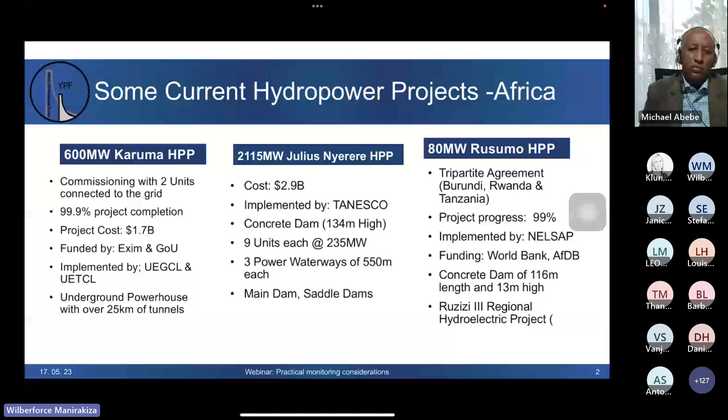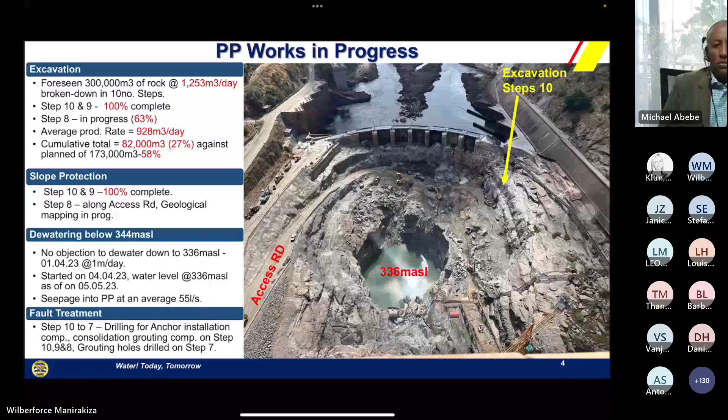You are also invited to the Africa Hydro Conference, which will be from 10th to 12th July 2023, hosted in Uganda. Back to you, Janice.

Thank you so much, Wilberforce. It's always so exciting to hear about the current hydro projects that we have in Africa, as we all know there's so much potential in Africa, and us as engineers need to do our best to make sure that these projects are optimized and go forth to help the communities around us.

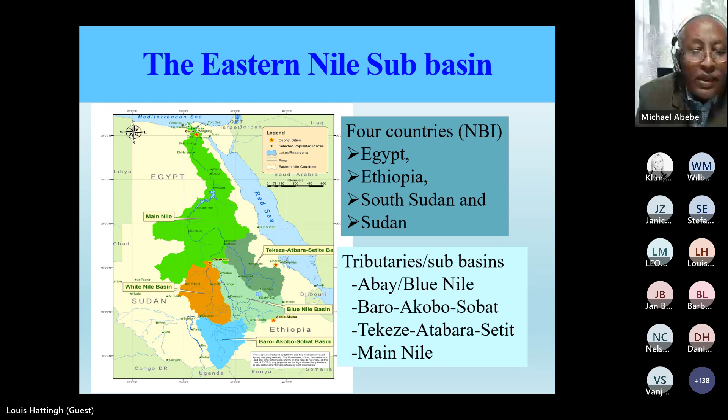Now I'll give some idea about the storage or dams available in the Eastern Nile countries, showing why dam safety is an issue in the sub-basin. The first is the GERD, the Grand Ethiopian Renaissance Dam, about 145 meters high, an RCC dam with an installed capacity of about 5,150 megawatts. It also has a saddle dam, 50 meters high, a concrete-faced rockfill dam. The dam is currently under construction, with storage capacity estimated at about 74 billion cubic meters.

The Tekeze Dam is also in Ethiopia, the highest concrete arch dam in Africa, with about 300 megawatt capacity. It was commissioned in 2009. Both dams are located in Ethiopia.

This is the Sennar Dam, located in Sudan, a 39.5-meter-high composite dam with masonry gravity sections and earthen flanks. It was commissioned in 1926 and has been in service for more than 95 years. It is located on the Blue Nile river.

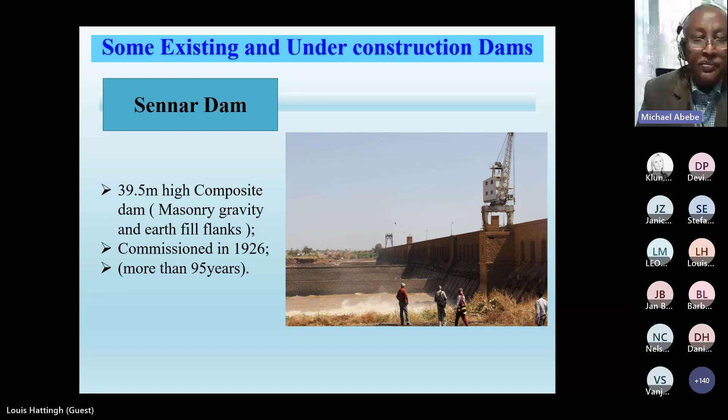The Aswan High Dam, which most of you know, is located in Egypt, a 111-meter-high composite dam, rock-filled with a concrete gravity section. It is the second largest water storage capacity dam in Africa, with a capacity of about 162 billion cubic meters, and was commissioned in 1970. This highlights the large or mega dams available in the Eastern Nile countries.

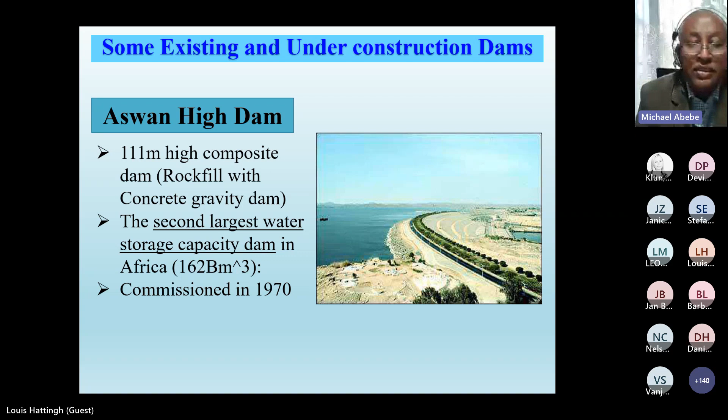Now, the dam safety activities with regard to the Eastern Nile part: what are the key activities undertaken and what are the key achievements made in the last 10 years?

The objective of this program is assessing dam safety practices in the sub-basin countries and developing a roadmap for subsequent actions, creating an enabling environment with an appropriate regulatory framework and institutional development to identify responsible entities and organizational units, and strengthening regional cooperation on safety management of transboundary dams. Overall, the main objective was to assess the capacity in the basin and the capacity gaps, and to act on the gaps identified during the assessment.

The project was launched in 2013 with support of the World Bank as part of the Nile Basin Trust Fund. It's been almost 10 years since it started the dam safety capacity building programs in the Eastern Nile Basin.

What we did first was assess the existing legal and institutional framework, technical and human capacity in the 4 countries: Egypt, Ethiopia, Sudan, and South Sudan. What are the legal or regulatory frameworks? What is the institutional arrangement? Who is responsible, and how is it arranged with the responsible entity? What is the role of the regulators and also dam owners and operators? And also, the third one is human resource capacity.

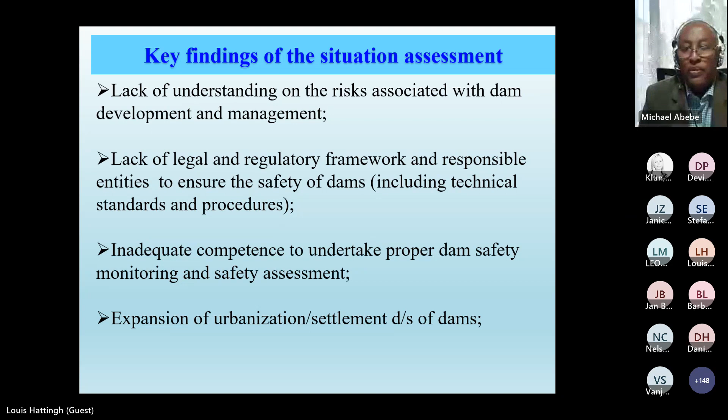The next one is lack of cooperation in transboundary dam safety management. These dams also have transboundary effects, so there is no cooperation among the countries in managing the safety of these dams.

Next is financial constraints to undertake proper maintenance and regular safety assessment of dams. Proper maintenance work is one of the key aspects of safety management, but we identified constraints, particularly by dam owners, in undertaking proper maintenance and regular safety assessment of dams.

Finally, we identified uncertainty of climate change and its implications on operations and safety of dams, particularly aged dams. This is also one of the critical issues in dam safety management in the Eastern Nile countries.

After identifying the critical issues in these countries, we developed a roadmap outlining what actions should be undertaken to alleviate these problems or make progress on dam safety management in the Eastern Nile countries.

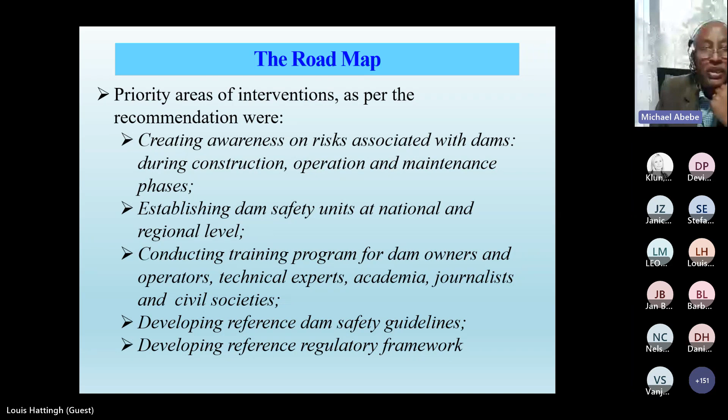The last one is developing a reference regulatory framework. As I mentioned earlier, this is the key concept or foundation for proper safety assessment and ensuring the safety of dams. So we suggested developing a reference regulatory framework for the Eastern Nile countries.

Based on that roadmap, we organized different technical trainings. More than 400 professionals have been trained in various dam safety related topics. Participants included parliamentarians, regulators, dam owners, dam operators, consultants, experts, and professionals. A lot of stakeholders were involved in the training programs.

In addition to the Eastern Nile countries, we also invited experts outside the Eastern Nile countries to take part in the dam safety training: Mozambique, Zimbabwe, Zambia, Malawi, Nigeria, Ghana, Liberia, Tanzania, Rwanda, Uganda, and Kenya. We invited technical experts from these countries to take part in the dam safety capacity building programs.

This is to give you an idea of one training program, which was to provide awareness of dam safety projects and its relevance to high-level officials. In this picture you can see parliamentarians represented from Ethiopia, South Sudan, and Sudan who attended the workshop. We discussed the role of government, dam owners, and operators in managing the safety of dams, including discussions with parliamentarians about their roles in ensuring dam safety.

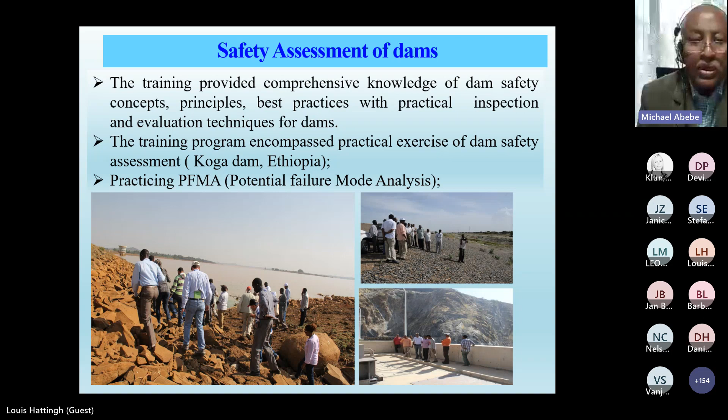The Eastern Nile Technical Regional Office also has internship programs, with the objective of creating a network of young water resource professionals in the sub-basin and engaging them in the development and enhancement of knowledge-based products. These are graduated master's or PhD students, postdoctoral researchers from academic institutions, as well as young staff in ministries. A total of 15 young professionals engaged in the dam safety programs.

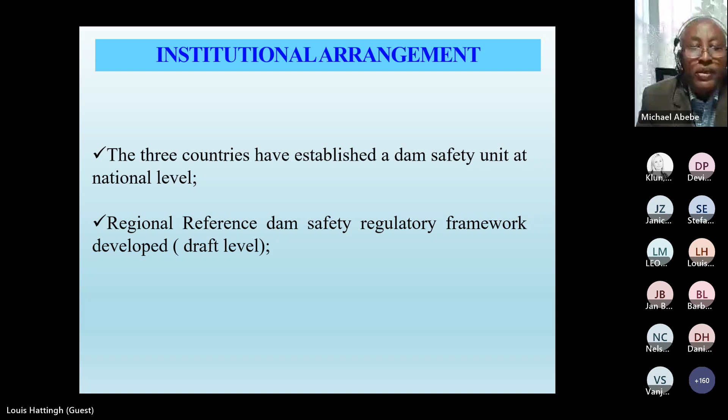The next topic is the Nile Cooperation for Climate Resilience Project, called NCCR. It encompasses the whole Nile Basin countries. Originally it was only for the Eastern Nile, now it covers the whole Nile Basin. The program started in 2021 until 2025, supported by the World Bank CIWA Fund.

To give some background, this project was launched in 2021 and will be completed in 2025. It builds on good practices achieved in the Eastern Nile Dam Safety Project, where good progress was observed on dam safety management activities in the Eastern Nile countries. Countries wanted to upgrade or scale up the project to the whole Nile Basin, which is why this project came into being.

It encompasses all Nile Basin countries, coordinated by two NBI centers: the Eastern Nile Technical Regional Office at ENTRO, based in Addis Ababa, and the Nile Equatorial Lakes Subsidiary Action Program Coordination Unit, NELSAP-CU, based in Kigali. The overarching objective is strengthening the institutional environment for dam safety, improving the information base, and increasing coordination of dam safety management in the Nile Basin countries.

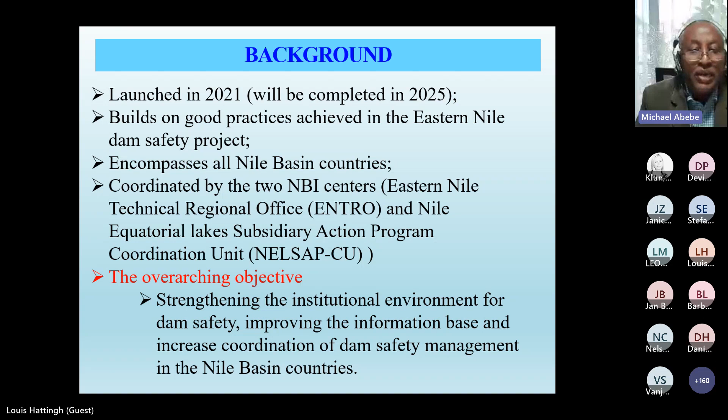The components of this project include conducting training programs on various dam safety related topics, and establishing national dam safety units in the NEL region. Eastern Nile countries have already established their own dam safety units; the next step is to establish these units across the wider Nile region.

Other components include strengthening national dam safety units at basin level, and developing a geo-referenced inventory of dams in the Nile Basin to understand the number and location of existing dams. The next is development of a risk management framework for dams in the Nile Basin, and an assessment of the legal and institutional framework for dam safety in the Nile Basin, to understand the legal and institutional aspects across the region.

As I mentioned earlier, we have tried to do some assessment in the Eastern Nile, but now to make it more comprehensive, it was suggested to develop some assessment for the whole Nile Basin countries. The next one is development of a model national regulatory framework that covers standards for new dam development and safety of existing dams. This is a very critical thing, as I mentioned earlier. One of the ideas of the project is to develop a model national regulatory framework so countries could adopt it for their own purposes.

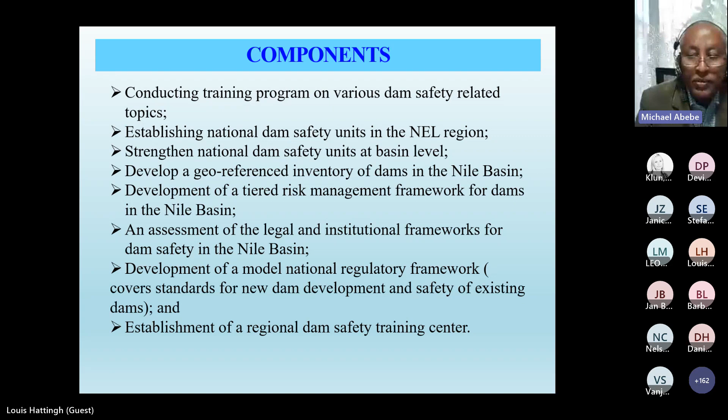Next one. So key accomplishments: as I mentioned, it started in 2021 and continues until now. Training of experts on various dam safety related topics has been carried out, and a draft report on the Nile Basin dam safety regulatory framework assessment was submitted, with a consultation meeting held with the Nile Basin dam safety working group.

As I mentioned, the draft report was submitted and discussed with key stakeholders. A draft report on the inventory of dams in the Nile Basin was also submitted, and a consultation meeting with the Nile Basin dam safety working group was conducted. So the inventory of dams and the framework are now at draft level. A consultation was made, so hopefully they will be finalized in the coming one or two months.

Next one. These are my conclusions. Building institutional capacity is of paramount importance for sustaining and ensuring the safety of dams. We need to recognize the need for capacity building programs at all levels. Next is setting institutionalized dam safety management, meaning including the legal and regulatory framework, with a responsible entity having the required technical capability and financial resources in place. We have to ensure that dams are properly designed, constructed, operated, and maintained safely, and do not pose an unacceptable risk to life, property, and the environment for downstream communities.

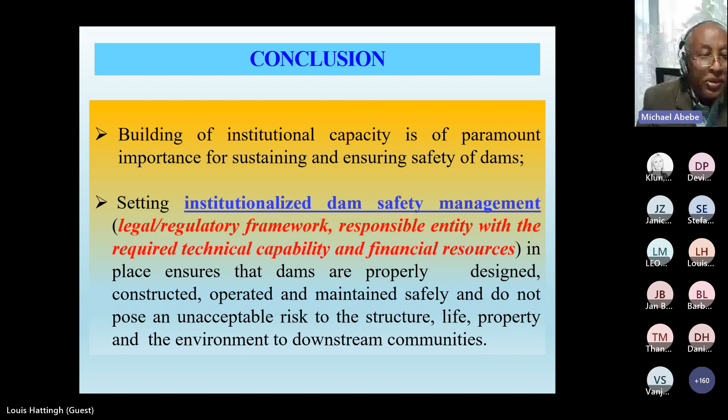So this is my key message to participants, particularly for developing countries: you have to formulate a standard national dam safety management framework at the national level that will contribute to ensuring the safety of national or transboundary dams. Thank you very much. Finished.

Thank you, Michael. It is really lovely to see all the work that you and your team have done. We'd really like to thank you for that, because as most of us know, in many African countries we don't really have standards and guidelines on how to actually safely look after and monitor our dams. Thank you for identifying the problems we are experiencing with our dams and how we can approach them with the roadmaps and guidelines that you and your team have written up for us.

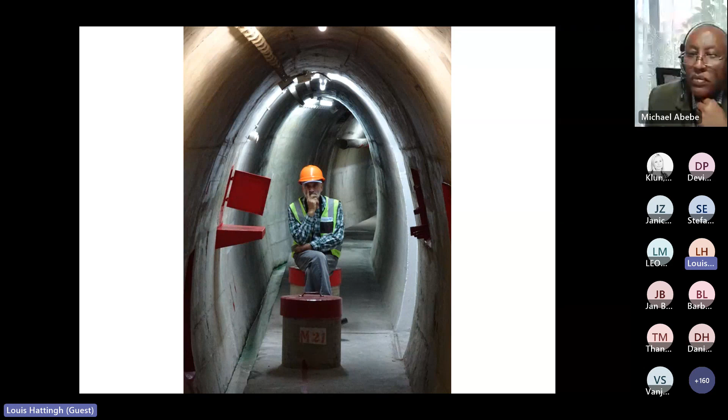So I want to first tell you guys what I'm not going to do today. I'm not going to provide any recipes or specifications, and I'm not going to tell you how many instruments you must use and where you should use them. What I will do is share some of my experience, and hopefully pose some questions and provide some food for thought if you want to do something on the monitoring side. I'm going to really focus on the basics, so I'm not going to discuss any new technologies or new things. I'm really going to focus today on the basics that normally don't get a lot of attention.

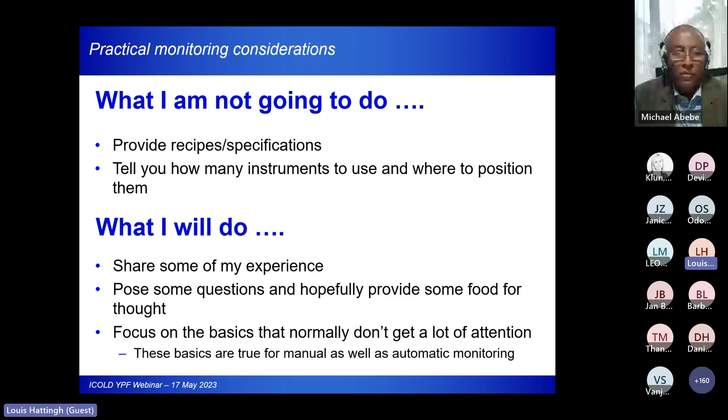So I want to start off and pose the question: what is the definition of surveillance? I'm putting on my ICOLD committee on dam surveillance hat, because I know the industry out there interchangeably talks about surveillance and monitoring and inspections, and sort of mixes all these things together.

In the ICOLD sense, in the bulletins produced in the past, the definition for surveillance includes three major aspects: first monitoring, then visual inspection, then checking and testing. Checking and testing is not checking the results of your monitoring and visual inspections—that's very important. Checking and testing are for components like mechanical equipment, electrical equipment, things we struggle to do visual inspections and monitoring on, that we need to check and test on a regular basis. All of that together is the definition of surveillance. So in the rest of my talk, if I talk about surveillance, that's what I mean.

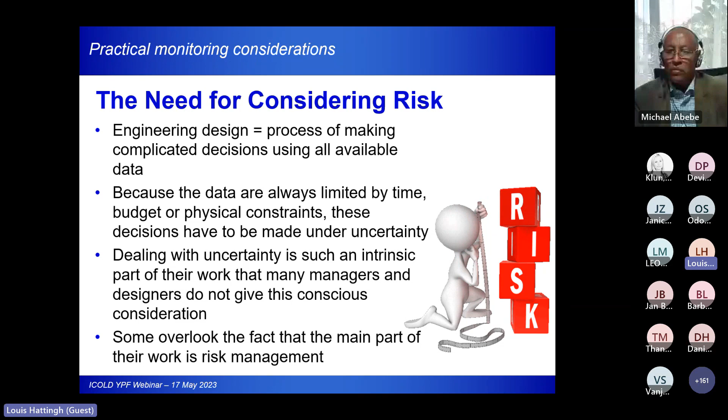The other concept I want to talk to you guys about—because it's very important to understand with regards to monitoring as well—is that if we have uncertainty about something, one of the ways we can manage or improve it is to gain more knowledge. The more knowledge you have about the subject you have uncertainty about, the less uncertainty you will have.

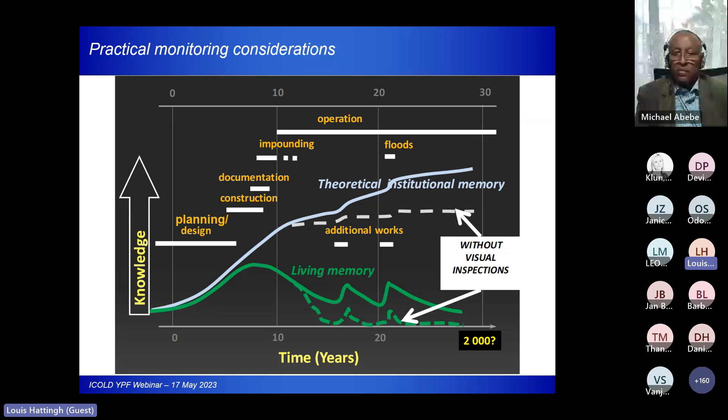One of the questions is, yes, you are now operating the dam, but there might be 2, 3, or 4 generations after you that actually need to know about the behavior of the dam when you were operating it.

So I was talking about risk management, the need to manage this uncertainty. Surveillance plays a very crucial role during the operational phase of a dam to manage the risk of this uncertainty, because we gain information and we can take preventative actions if we see that we might get a failure before it actually happens.

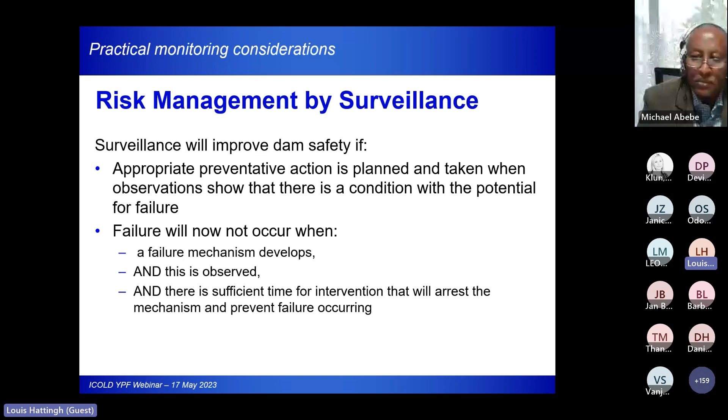One of the other things I grew up with in my system, and I can promise you it is crucial to appreciate this, is as Ralph Peck has stated: there is no substitute for systematic and intelligent surveillance. It's very important—systematic, intelligent. If you don't follow those two principles, as I get older I actually tell people that they're wasting their own time and other people's time, because we're creating more uncertainty if we don't follow those two principles. Very important to remember that.

Now, with that in mind, Michael was talking about dam safety management, including surveillance. You need to understand how your dams are actually going to fail—what are the failure modes and failure mechanisms? And to understand your failure modes and mechanisms, you need to understand the dam materials you're working with. In many cases, people don't understand the dam materials they're working with, especially regarding surveillance and monitoring, and they implement the wrong solutions. Then you create more uncertainty because you don't get what you want out of the effort.

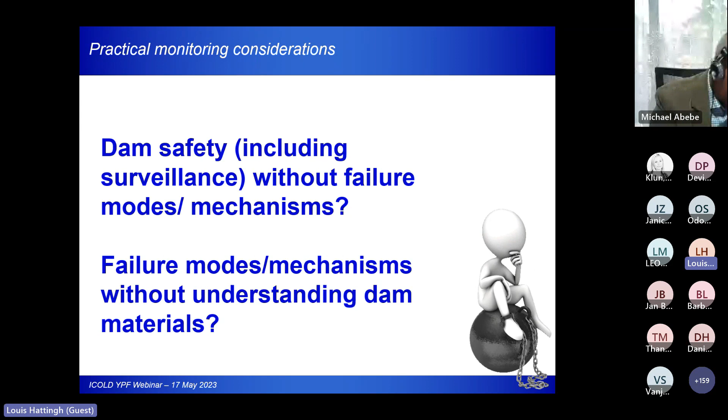The other very important concept I want to highlight—again, I grew up in a system that believes in this—is something John Dunnicliff wrote in his book, one of the guidance books we use in monitoring: every instrument on a project should be selected and placed to assist with answering a specific question. If there's no question, there should be no instrumentation. So you need to understand why you actually put the instrument in. Why do you do monitoring?

I see it so many times that when I ask people why they put an instrument in, they tell me, well, I saw somebody else put it into their dam, and I thought if somebody else uses it, we can just as well use it. It will create more uncertainty. You need to understand what your system, or your dam, is actually doing.

So the ideal monitoring system is as follows: it should be simple, it should give you sufficient information when you need it, and it should have redundancy—I'll talk about that later. It should be durable, reliable, low cost, low maintenance, easy to measure, and provide foolproof readings. That sounds all so easy, but I can promise you it's not. So I'll try and give you some guidance on that.

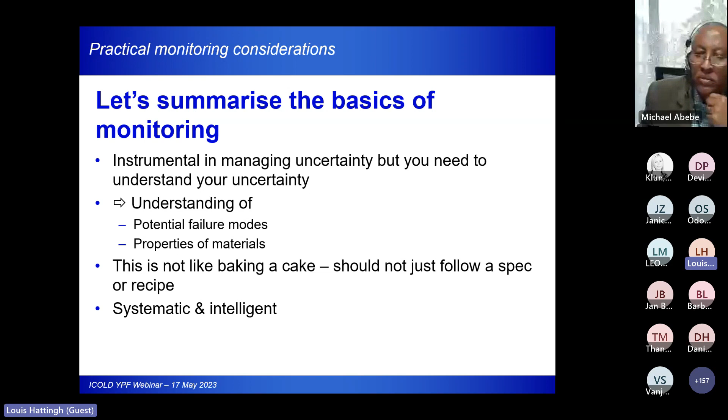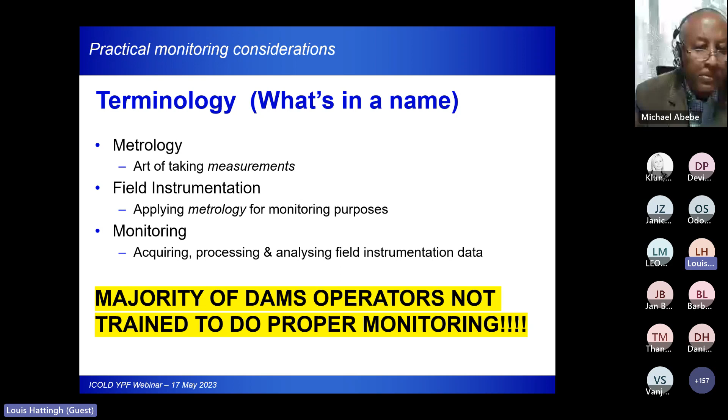It's really an art to take proper measurements. Unfortunately, through my professional life, I've seen that the majority of people required to take measurements are not trained to do proper monitoring and take proper measurements. It's not the focus of most people. Hopefully after today I can inspire a few people to get them trained properly so they can take proper measurements.

So how do we do basic metrology?

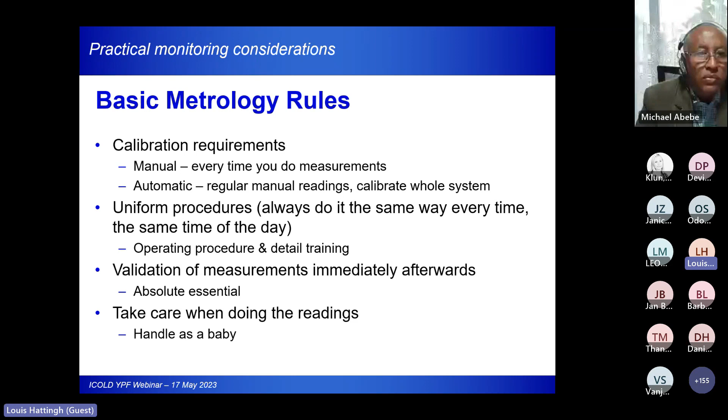Also take care when you're doing these readings. There are some other general monitoring things that are very important to follow.

Another thing that is very important, and I struggle to convince a lot of people about this, is to collect monitoring metadata. Whether you do manual or automatic monitoring, it's extremely important. The databases you have, whether Excel or a customized information management system, should make provision so you can record the metadata.

That metadata includes, for instance, if it's a manual recording, who was the person responsible for the observation, information about what readout unit or data logger was used, your calibration readings, and any comments that came out of that.

I've seen it so many times - you try to interpret monitoring results, you see a step, and you don't know 20, 30, 40, 50 years down the line why the step happened. If you're fortunate enough to still talk to somebody who was involved at the dam, they'll tell you, well, we started using a new readout unit or the instrument was replaced. It's extremely important to record all that metadata for your monitoring system.

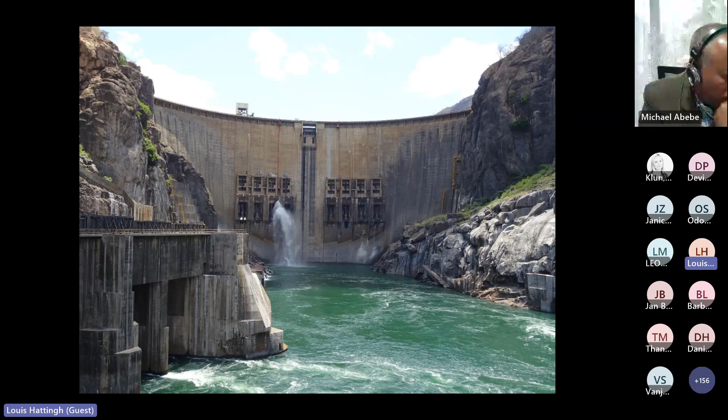I'm going to quickly show you a very good example here in Africa of a dam where very good monitoring is taking place. This is Cahora Bassa Dam in Mozambique on the Zambezi, one of our mega dams in Africa. It's a 170-meter high concrete arch dam.

They have more than 1,000 monitoring points in the dam, and every single monitoring point has a description - an instrument name, the elevation of the instrument, and they even put the database number there. So for every single instrument you get to, you don't have to guess what instrument you're working with. These guys have been trained since the beginning of the dam to do things properly.

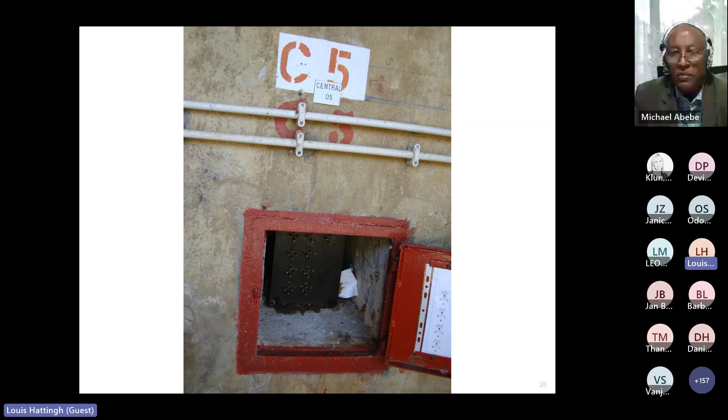I'm going to show you some examples. Every single instrument has proper signage. This is an old Carlson instrument, before vibrating wire instrumentation became the norm - these were installed in the early 1970s, and you can see what they actually do.

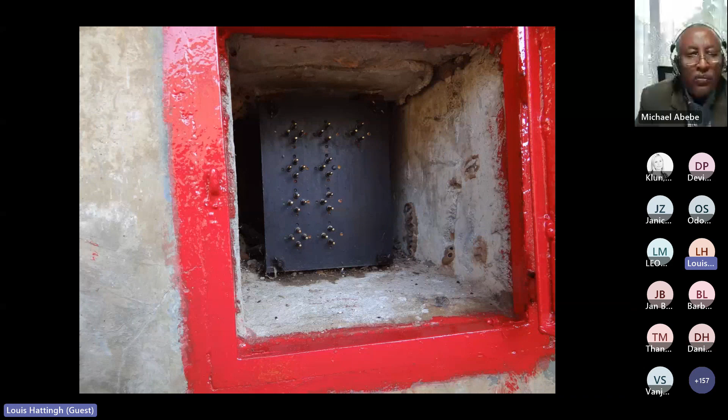Every time they do a measurement, they clean it, take the measurement, and then clean it again and protect it. So you will see no corrosion. Those are actually brass, but you see no corrosion. There's even a sheet at each of these stations so you know precisely what you're dealing with.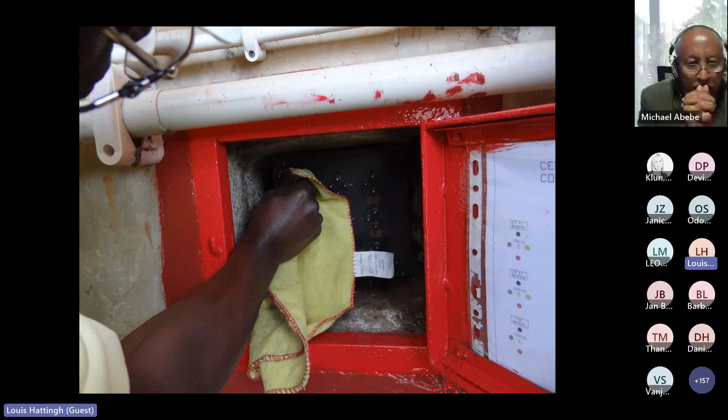Very, very important. So you guys can see just some more photos, and as a result you get data sets of information. Here you can see the displacements, for instance, with no gaps. So if I look at that, with the concept of uncertainty, that information does not create uncertainty in my mind. It actually creates certainty about what I'm trying to measure.

The interesting thing here to remember is that Mozambique was actually in civil war from 1977 to 1992. So it's amazing for me to see a dam with a record like this, even when we had the civil war going on in the country.

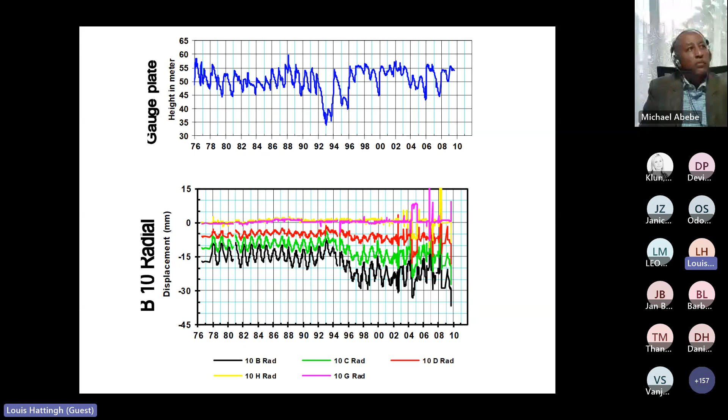Now I'm going to show you some examples of where things went differently. You guys can see this is a big dam here in South Africa. Since 2004, the information started getting a bit iffy, and you will agree with me, the uncertainty of what actually happened with regards to the displacement at this dam increases.

Here's another example of a dam. You can see fairly good information until about 2001, and then it seems the person who's supposed to do the monitoring just completely lost interest. So since 2001, we basically have uncertainty about the behavior of this dam, which increases the risk for us. That is what we don't want to do.

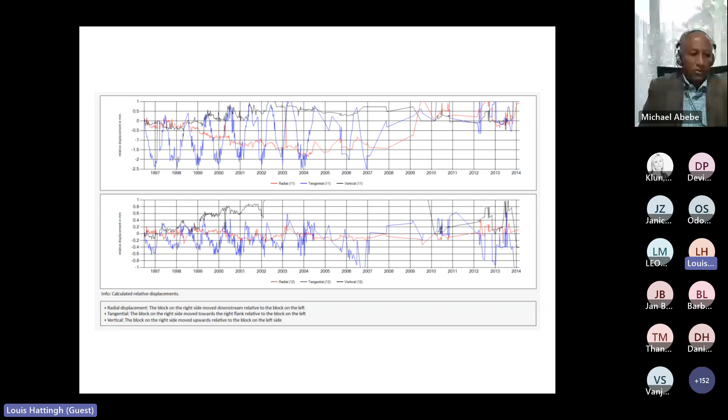I want to pose some questions to those of you who are actually performing dam safety evaluations today. The first one: have you checked whether the dam operator knows how to do proper metrology when you did your inspection for your dam safety evaluation? And if you found out the person doesn't know, did you show them how to do it properly? Or you must ask yourself, do you yourself know how to do proper metrology?

Another thing is that normally, people do dam safety evaluations and inspections, but they don't do an evaluation and inspection of the monitoring system itself. It is crucial that you actually do that. I get it many times.

People ask me to help them with the interpretation of monitoring information. They just want to send me the information, they don't want me to actually go and visit the dam and do an evaluation of the monitoring system. It is absolutely crucial to go and do an evaluation of the actual monitoring system. You can't just do desktop interpretation. That's what I've learned through the years. You're going to miss things if you just try and do desktop evaluations.

So I'm going to start off with crack gauges, which is one of the simplest of instruments that you can actually install in a concrete dam. Okay, so a crack gauge just measures displacement, or translations.

But if we actually deal with concrete, it is very important to understand the characteristics of concrete, and many people don't take that into account when they decide on a specific monitoring system. One of the things is, for instance, your elastic properties. Concrete is a relatively stiff material, so even for large loads imposed on concrete, it actually does not displace a lot. That's one of the things you need to take into account.

But then we have things like creep, shrinkage, permeability, and very important, if we deal with dams, these chemical reactions that cause swelling. I'm not going to use alkali aggregate reaction or alkali silica - I'm going to refer just to chemical reactions that cause swelling. It doesn't matter what the type, but it's very important to actually keep that in mind.

So as I said, and I want to highlight it again, you need to have an understanding of the expected behavior of your structure before you decide on your monitoring solutions. With the crack gauges as an example, I'll try and show you what I mean. There are some questions I'm going to try and answer - about accuracy, the instrument type, the frequency of measurements, the readout unit, and calibration. Those are typically some of the questions you can ask for most monitoring systems.

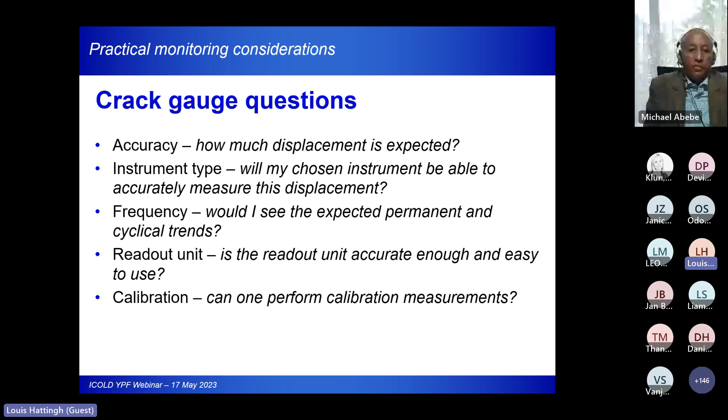My first question to you would be, what is the accuracy of an instrument like this? And I can tell you it's more a millimeter or more. So I'll try and show you now why I think this is not appropriate. It does not really give you any appropriate answers, and you can see a lot more if you install appropriate instruments. That's what I'm trying to tell you here.

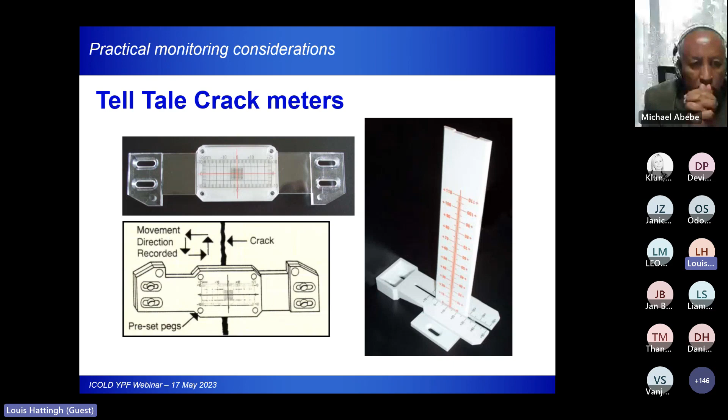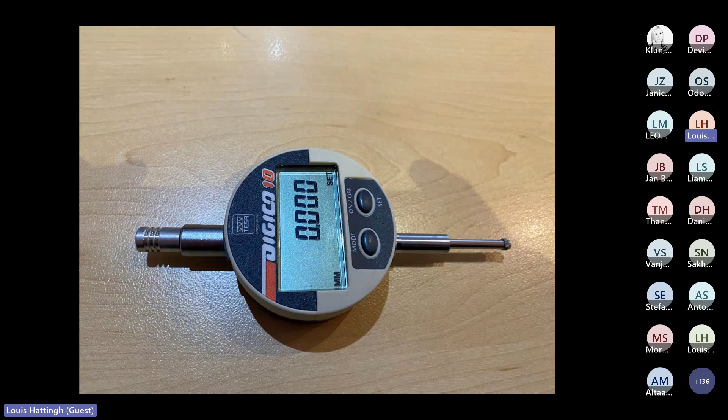Okay, so what I would suggest, I'm not trying to sell, but is to actually use a digital micrometer that has been adapted to fit snugly in your 3D crack gauge. All right, and these are the 3D tilt crack gauges that we nowadays use. So you can actually get rotations as well as translations from the results of these.

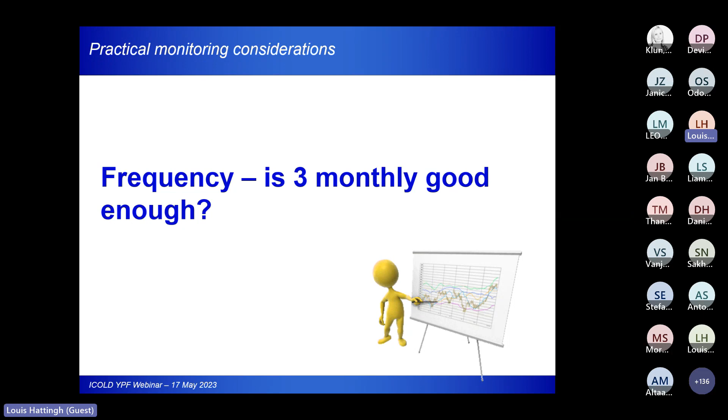So the other thing that I see a lot is if we use crack gauges like these, in general people think that using a frequency of 3-monthly readings is good enough. And yeah, I know a lot of people in the dam industry actually think these crack gauges don't show you anything. And I must agree with you if I see a graph like that, or a presentation like that, where the operator actually tried to do 3-monthly readings - I do agree that doesn't show you a lot, and most of you guys will agree with me that it doesn't show us a lot.

But now I want to show you the next one, where we have a very good operator that takes 2-weekly readings, that is systematic about it - first thing in the morning does the readings. Then you guys will actually agree with me that the results I'm showing you here, from the same crack gauge, the same type of crack gauge, we can actually see a lot more.

So here, if I can just show you, you can actually see the seasonal temperature change loading that we see. We actually see permanent deformations here. And I want to highlight basically the scale here - so this is 1 millimeter.

So now you can start thinking: if you have something with an accuracy of 1 millimeter, we might just see some of the tangential measurements, but we won't have a good idea about it. We won't see any of the radial and vertical displacements, which are crucial, the permanent displacements as well as the loading from seasonal temperature changes. So for instruments like this, we need an instrument with 0.1 millimeter accuracy, otherwise we won't see what we actually want to see from the results.

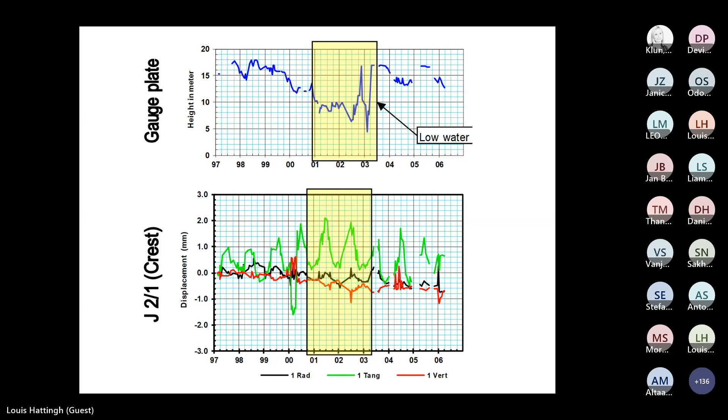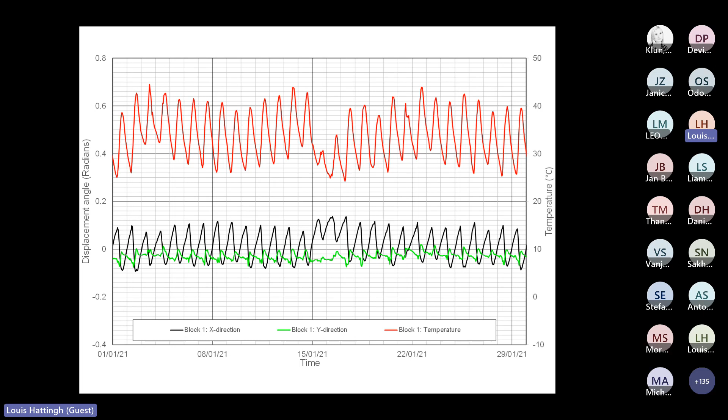The other thing is, if you do it properly, crack gauges can show and tell you so much when you do proper interpretation. It can show permanent displacements from swelling reactions - you can get a very good idea. For instance, if you work with an arch, where your main arch action is, where your main stresses are concentrated - all sorts of very important information from this very simple instrument.

I know a lot of people, especially in concrete dams, feel it's a waste of time to use this instrument. So this is basically just my take: definitely use a 3D crack tilt gauge with 0.1 millimeter accuracy. Make sure you have calibration that you do before and after your daily measurement.

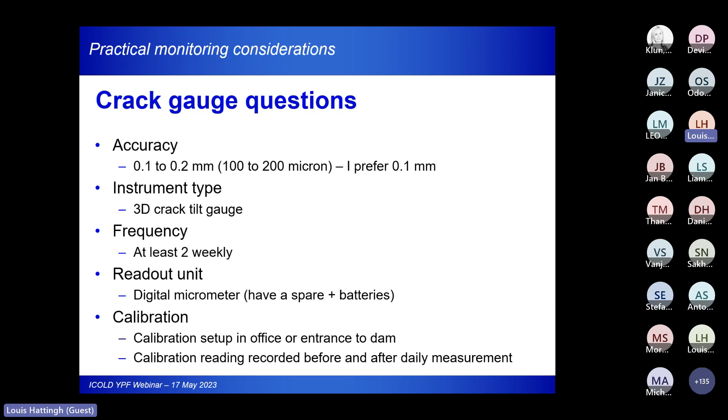Some other important concepts I want to talk about are with regards to geodetic surveys, and I need to speed up a bit - I've fallen behind with what I wanted to tell you. If we look at some of the issues I see, especially when we want to do geodetic surveys with concrete, it's with regards to accuracy and thermal effects on the instrumentation as well as the network. Also, in many cases, people don't understand that you actually need a proper network on the outside - they think you can do a measurement just from one fixed point outside your dam.

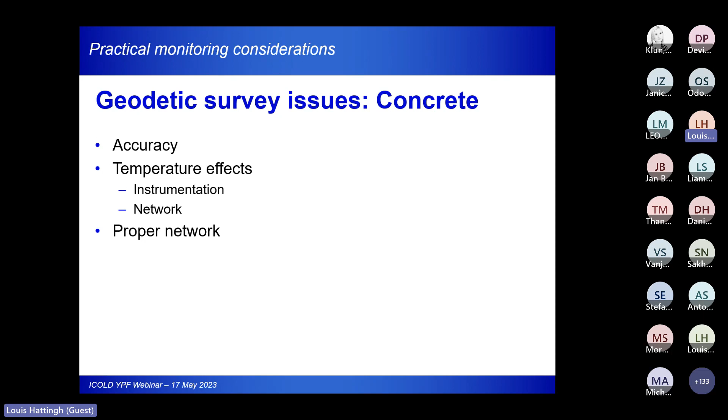This might not be relevant for many of you, but in the world where I work and live here in Africa, I see a lot of times people think you can use a normal surveyor with a GPS system to perform a geodetic survey of a concrete dam. I even see surveyors who claim they have 1 millimeter accuracy. If you actually look at the accuracy of these systems, you'll know we're still looking at about 10 millimeters accuracy. So definitely, absolutely not - if you work with an important large dam, it will not provide you with the accuracy and the right answers if you use that.

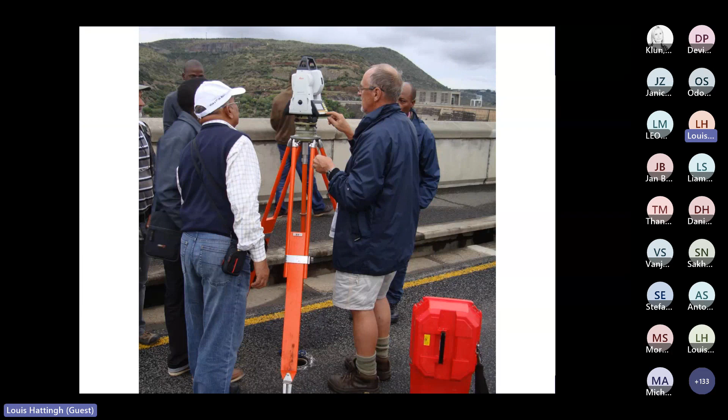And what I mean with this is people actually just using normal survey studs with a mobile prism system that they're trying to balance, walking around. And I think I've already showed you the typical displacements we can actually expect in a concrete dam, so definitely that would not work. You really need high precision survey equipment to do that.

Including high precision prisms, for instance, and a permanent setup.

The other thing we've really seen through the years, and we've changed it here in South Africa, is these beacons, either on the dam wall or on your network, but especially your network. If you have a beacon that is made from concrete and not isolated from thermal effects, it will actually displace as the sun goes around and have a huge effect on the accuracy of your geodetic measurements. So you need a system where you can actually isolate your beacon. This is a double system that we use, so your beacon is actually thermally isolated.

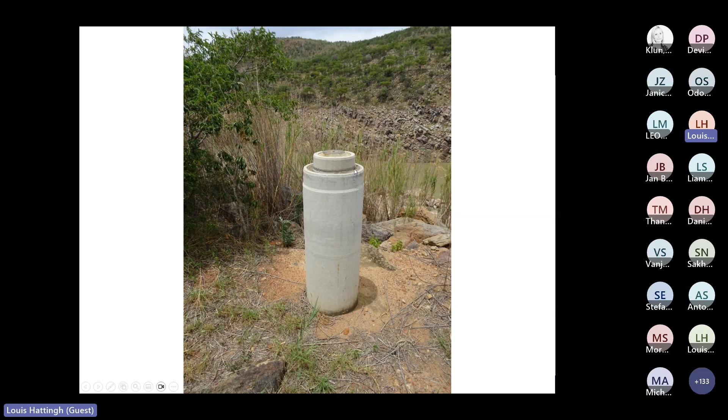And then the other thing that is very important for me, that I've seen through the years in many cases, is people implement geodetic survey systems and focus on the center cantilever. They might extend it to the crest of the dam wall, but they don't actually do a survey of the whole dam, if, for instance, it's an arch dam.

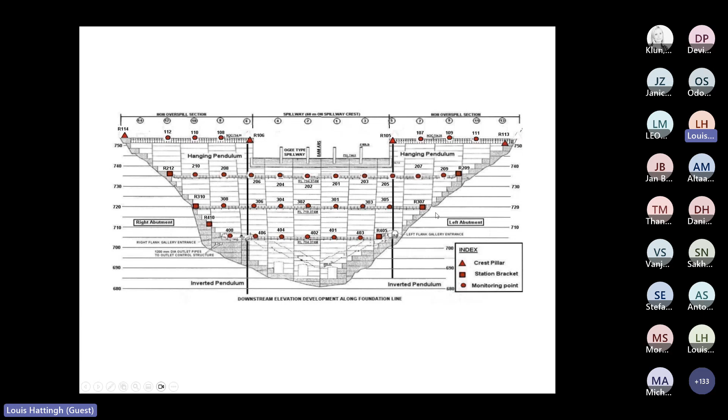So this example I want to show you is especially when you deal with an arch dam that has swelling due to chemical reaction. This is Kouga Dam in South Africa. If you look at the center cantilever and look at the swelling, that is the vertical displacement, in most cases people just look at the center cantilever and the vertical results. From this, they would conclude that since 2003 the swelling in the dam has actually stopped. Unfortunately, that is incorrect.

If we look at the quarter points and the displacement in the upstream direction, you'll actually see that the swelling has continued. So it's very important to understand your structure and the actual properties of your swelling.

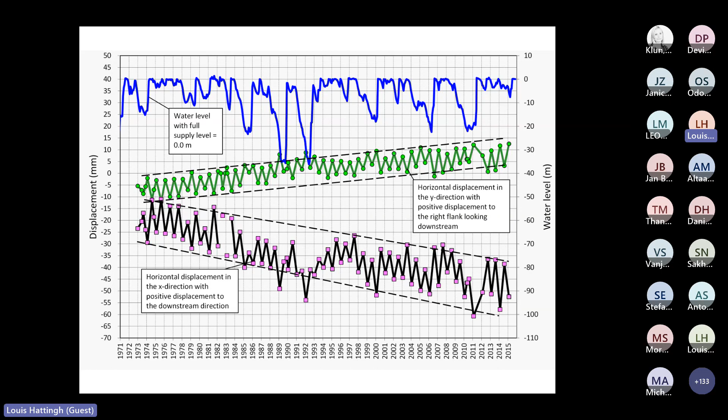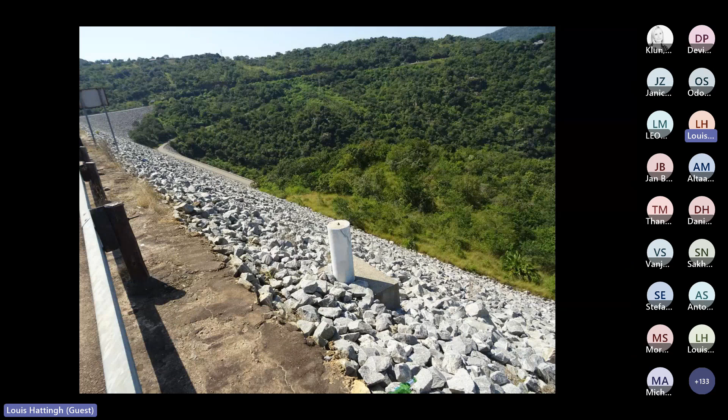Good. Then on embankments, the only other thing I want to highlight is the position of survey points. I've seen this many times. This is typically a dam with a public road over it, so it's basically impossible to have a beacon in the center of the dam. But people actually evaluate it and say, well, it's got a clay core.

There is a clay core, you guys can see, and I've seen reports where people actually refer to the displacement we get as the core's displacement. What we're actually monitoring here is the rockfill shell displacement, not the clay core. So be very careful when you do interpretation, especially with embankment dams. Make sure if you say it's your core's displacement that you're looking at, it is actually on the clay.

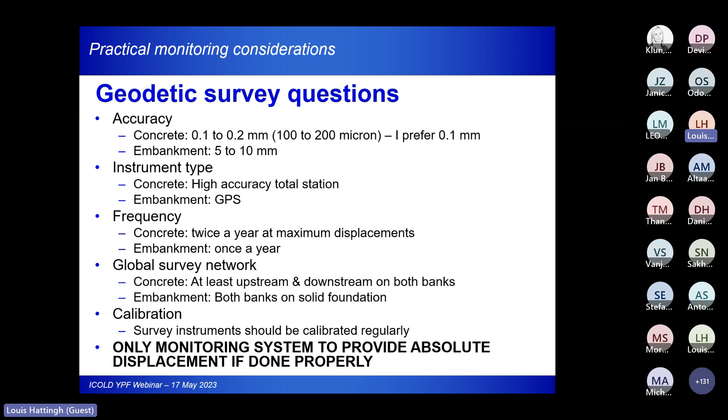So there are some basic takeaways from my side. Yes, on accuracy for concrete: my experience has taught me that we try to get as accurate a measurement as possible for concrete and embankment. We can use GPS accuracy, so 5 to 10 millimeters. If anybody tells you that GPS can give you better, especially the mobile ones, maybe in a couple of years' time we'll get that, but not at the moment.

So the next thing I quickly want to talk about is seepage measurement. It's an important, basic concept that I want to cover. Here are some examples of typical seepage measurements, especially for seepage in dams, and in my environment most people actually use these V-notch weirs.

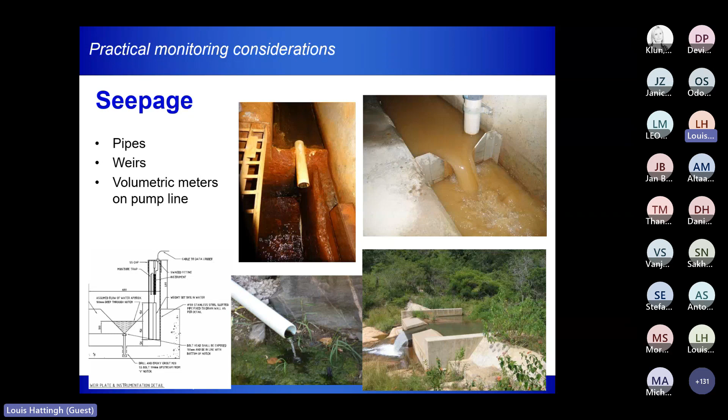Through the years I've actually come to be reluctant to use V-notch weirs, and I'm going to show you some examples. Here are some of the seepage weir issues I just want to highlight. You guys can see there are a lot of things that can actually go wrong if you do seepage monitoring.

But what I also want to highlight, if you do automated monitoring, especially if you use vibrating wire piezometers, is to make sure that you use a vibrating wire piezometer that can be activated, especially in the water depth that you're working with.

I've seen it so many times. People use normal vibrating wire piezometers where the diaphragm only actually activates when you have more than 1 or 2 meters of water pressure, and people try to use it with 100 or 200 millimeters. So you will actually get the wrong answer. Be very careful.

I'm not saying it's bad to use automated monitoring systems for that, but with that, I will talk a bit and show you that you need to be able to calibrate them regularly as well.

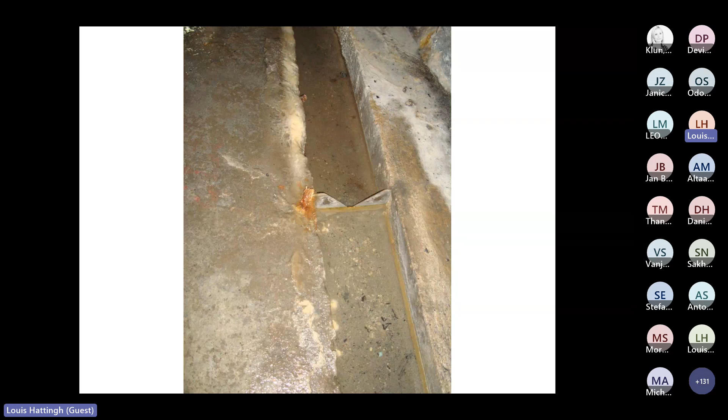Here's just some examples. You can see this is a completely sedimented V-notch, very difficult to actually monitor. The solution that was implemented here is that each time you remove the ruler. In this particular case, the water is supercritical flow upstream, so also very difficult to properly monitor.

This example I want to show you, it might look very good, but if we go around the corner, you will see it's very difficult to actually take a physical reading.

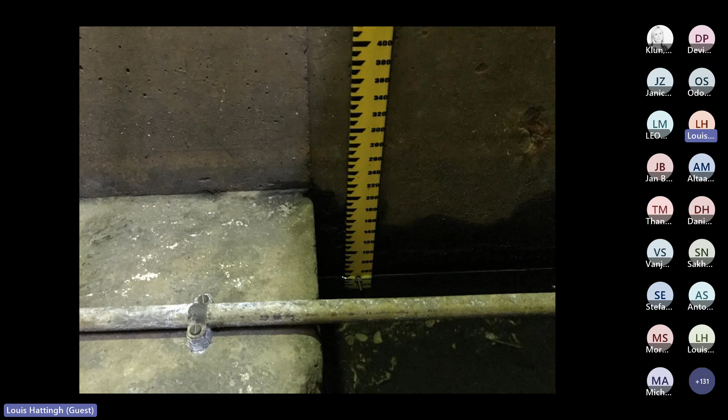In this particular dam, they tried to implement all sorts of automatic systems, and none of them was successful, to be honest - a lot of sediment in this one. So sediment, if you still do manual monitoring, and if you understand hydraulics, that will have a huge impact on the results you can calculate if your V-notch gauge is completely sedimented like this.

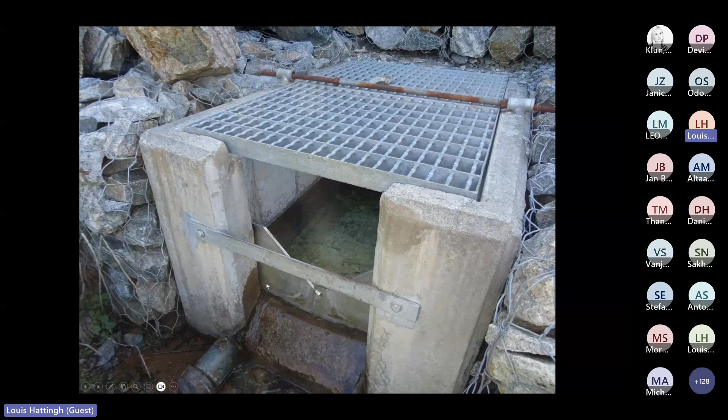This example, you can see the amount of seepage around the V-notch plate, and also where the ruler sits where you must take a measurement. It's basically impossible to do a proper measurement with this setup. Look at all the seepage that goes around the plate.

Then the other thing, if you do manual monitoring and your water level stays the same, you get either corrosion or discoloration of your gauging plate. So it's actually recommended to use something like this.

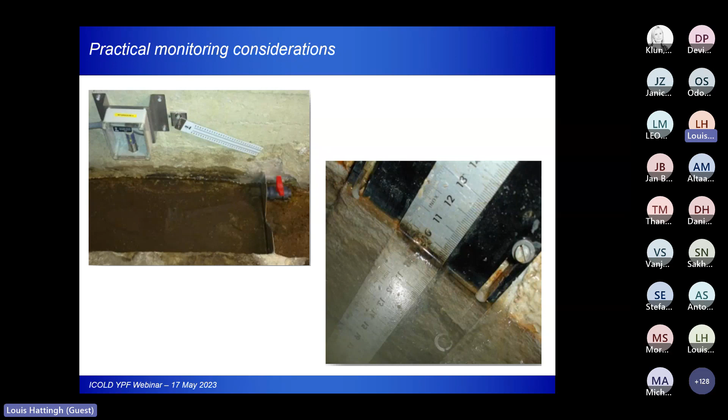So if you have an automatic system, you need to design it so that you can still do manual readings in some other form, to make sure that your system is still working.

What we found through the years is one of the things you should consider, especially if you work at a dam that has sump pumps, is to put meters on there and do volumetric monitoring of those pump volumes. This is an example of Naute Dam in Namibia, and it gives very good results, better results than what the V-notch would have given you.

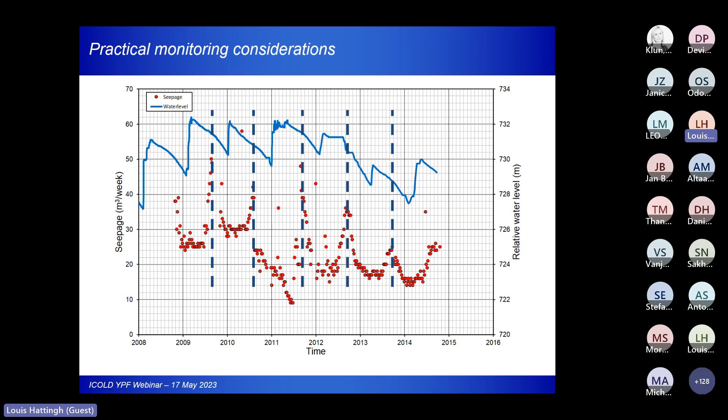In this case of interest, you saw this very flat arch - in winter, the colder part, that's actually just the arch bending forward and the heel, the upstream side of the arch, opening up, and you actually see the increase in seepage. We see that basically in most of our arch dams - you will see that if you do proper monitoring.

Of interest, I refer you to Cahora Bassa. In the past, they've been doing volumetric seepage monitoring since the 1970s, with very good results.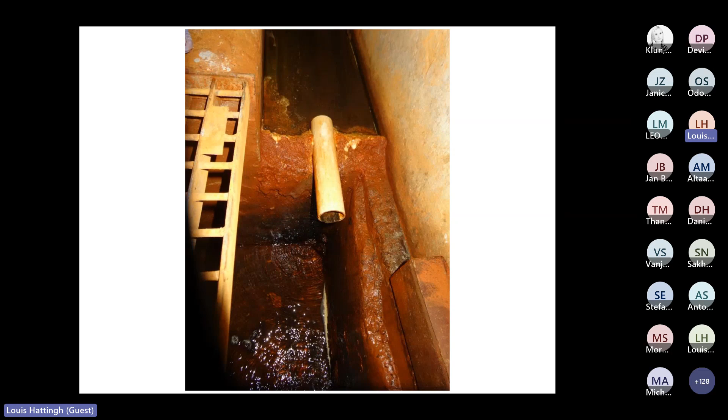This is the example I want to show you, and you can see the same - in winter, you can see an increase in seepage, which is expected. The only other thing, talking about presentation of results, if you want to compare seepages with each other, one technique you can use is a log scale on your seepage, if you want to compare a very small seepage with a larger one.

A log scale actually works really well if you want to do that.

I think I've already said what I wanted to say about seepage. Before I finish with concrete dams, I want to pose a question about drainage holes, though I can't see your responses. Very few dams have any monitoring done on drainage holes. My question to you would be, why? For me, drainage holes are one of the most important aspects of a concrete structure, in that they drain your foundation or concrete structure, and we assume that drainage is working perfectly and that it reduces uplift, but we don't do any monitoring on them.

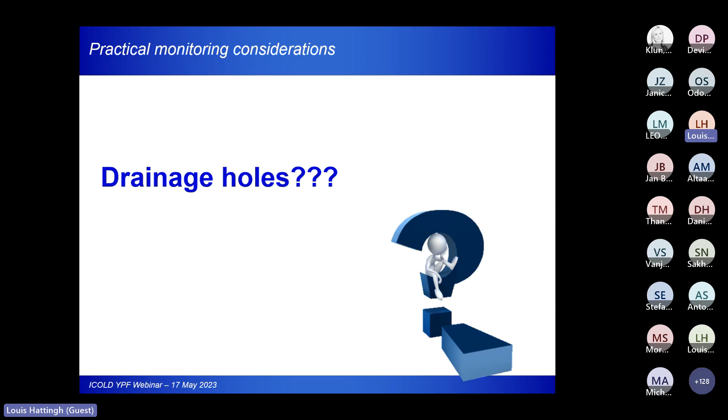Where I've been involved, I have started doing drainage hole monitoring. The first thing is you need to regularly clean your drainage holes, because they do get clogged and stop functioning if you don't clean them regularly. A very basic thing you can do is monitor the depth, but you should also monitor the flows from your drainage holes and the water levels if there are no flows, because that gives you an indication of what's going on in your foundation. In most cases, that is the only thing that can tell you what's actually going on in your foundation. If you look at failures of concrete dams, one of the most important potential failure modes is failure in the foundation, or on the interface between the concrete and the foundation. So it's very important to consider how you're going to do drainage hole monitoring going forward.

Lastly, on the monitoring side, I want to talk about redundancy. There are different types of redundancy we talk about, and the example I'm going to show highlights both types. When you embed instruments, whether in concrete or in soil, you need to think back to what I told you about the lifespan of your dam: do you have enough redundancy? Once you've embedded your instrument and want to start monitoring, and suddenly you have no results and the instruments aren't working, what are you going to do? The other type of redundancy we normally use is using different monitoring methods to confirm results.

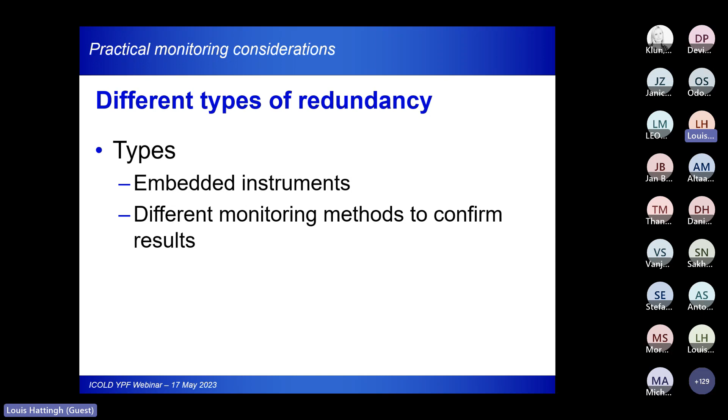I'm going to use earth pressure cells to explain the concept of redundancy. If you use earth pressure cells, you want to go from total earth pressures to effective earth pressures, and then to principal effective earth pressures, because that's what we really want to know, especially in an embankment where we expect some arching to happen — in other words, negative earth pressures that can cause piping or internal erosion in our structure. Unfortunately, most applications of earth pressure cells end up at best with effective pressures, because there isn't enough redundancy to actually get to principal effective pressures.

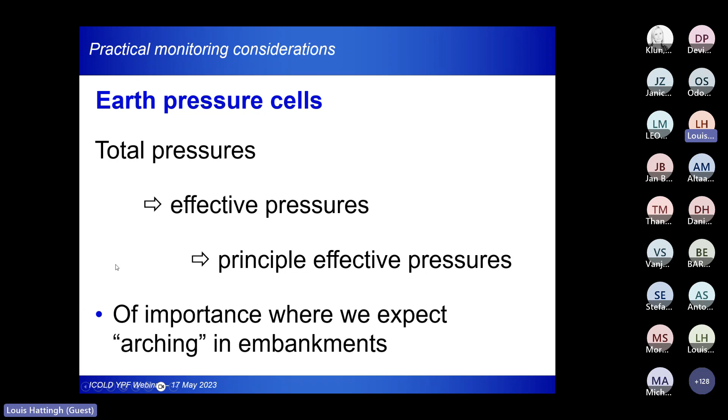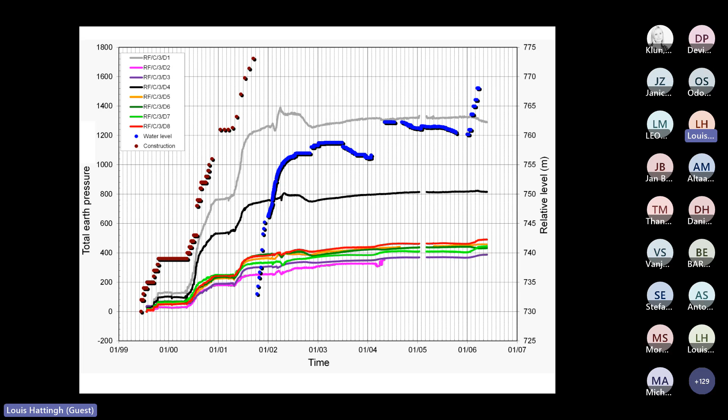Here you guys can see total earth pressures, so that's without looking at the piezometric pressures at that situation. If you look at it, it might look to most of you like we have total earth pressures and it looks fine. But if we actually go and do the calculation and convert that to principal earth stresses, we go through that process, you guys will see that we have negative earth pressures. The principal earth pressures that we calculate are actually negative, and we can get an angle for that as well.

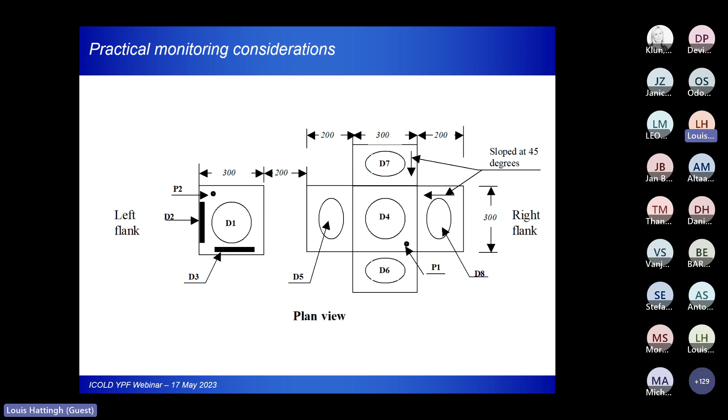So this is typically a cluster setup that we've used in the past here in South Africa. You guys will see even on the piezometer side, we need the piezometers to determine effective earth pressures to make sure we have redundancy. We installed 2 piezometers, which basically gives us redundancy in both directions that we wanted to determine the principal earth stresses. And there's just an example of the installation.

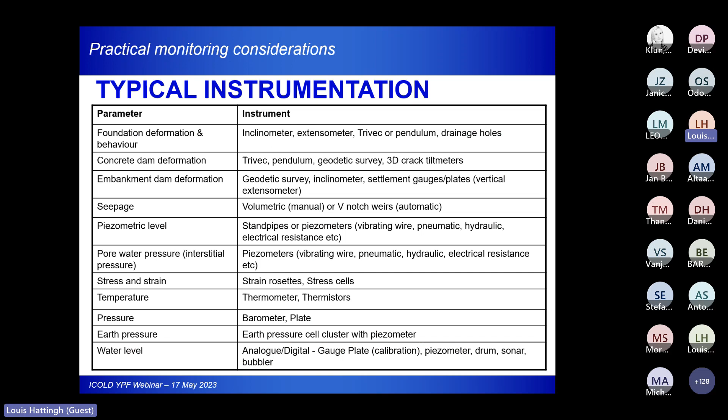So there's some typical instrumentation. I'm not going to talk about it, I'm actually running out of time.

Just quickly on proper presentation, for me that's very important - proper interpretation of your monitoring results. That helps you already. If you do proper presentation, yes, you need to go and analyze it, maybe with some regression and so forth as well. But as a first step, it helps you considerably to do proper presentation.

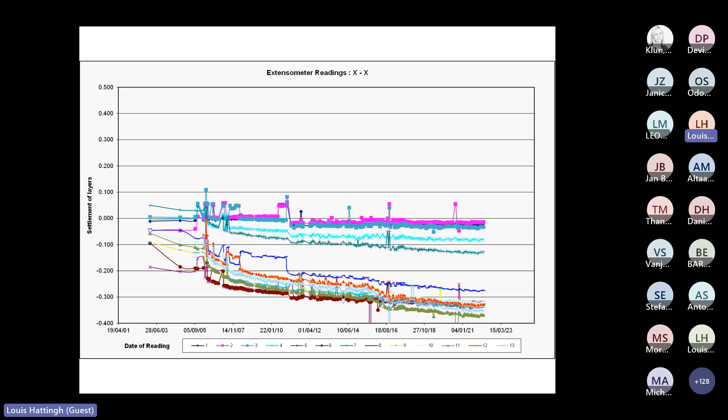So these are the total settlements, and these are the settlement between each measuring point. If you use that, it's very clear that here in the center of the dam you actually get much more settlement. So doing proper presentation can help you very quickly with interpretation as well. It is really worthwhile to be systematic in your monitoring results presentation as well.

Okay, and then one of my final things I want to talk to you guys about. So this is my very good friend, or was my very good friend, DJ Hagen. Maybe some of you guys have met him at ICOLD - here in South Africa he was well known and well loved. Unfortunately, he passed away earlier this year climbing into an unventilated manhole that was filled with toxic gases. This is one of the things that people don't give enough attention to, especially during the design of a monitoring system - they don't give proper attention to safety.

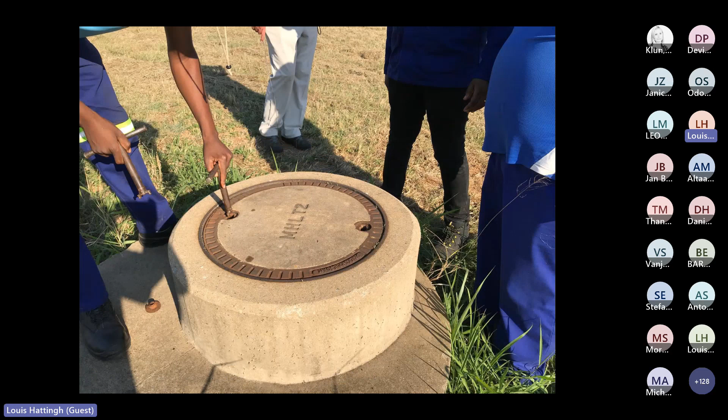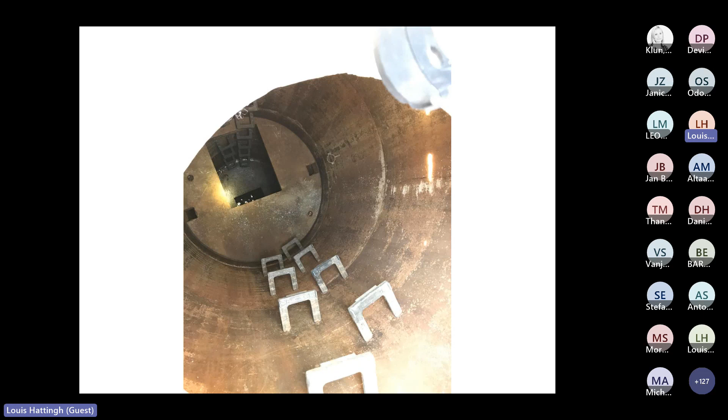And unfortunately, we lost DJ as a result. This is just an example of such a manhole, a deep manhole. There's a flow gauge at the bottom, and the designers actually expect the operators to climb down there without any proper ventilation to go and take a measurement at the bottom. So it's really a serious issue that we have to give due attention, and I hope in my involvement in dams we will not have such a tragic event happen to us again.

So ventilation, not just in manholes - ventilation in concrete dams is absolutely essential. And if it's unventilated, if you have to go in to do inspection or monitoring, you need to have appropriate monitoring equipment with you that can tell you whether it's safe to go into this unventilated environment or not.

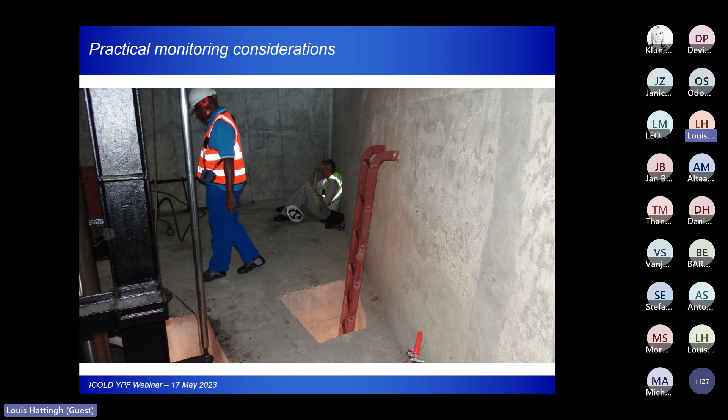My final thing that I wanted to just share with you guys, if you're not used to it, is our ICOLD family, our ICOLD surveillance family. This is our technical committee, the ICOLD Technical Committee on Surveillance. For me, it's really a family, a group of people that are absolutely passionate about surveillance and doing the right thing. If some of you visit ICOLD meetings, you will see some of us, and please come and visit us as observers in our technical committee if you have the time, all right?

And through the years, the committee has produced some really wonderful bulletins that will give you guidance on dam surveillance. This is the latest one that was published last year - we actually finished it like 5 years ago, but it's lessons learned from case histories. I'll also show you some other examples of really good guidebooks that you can use: this monitoring of dam performance published by ASCE, a very good book; John Dunnicliff's book; and the Corps of Engineers from the States also produces very, very good information and publications on monitoring that you guys can access.

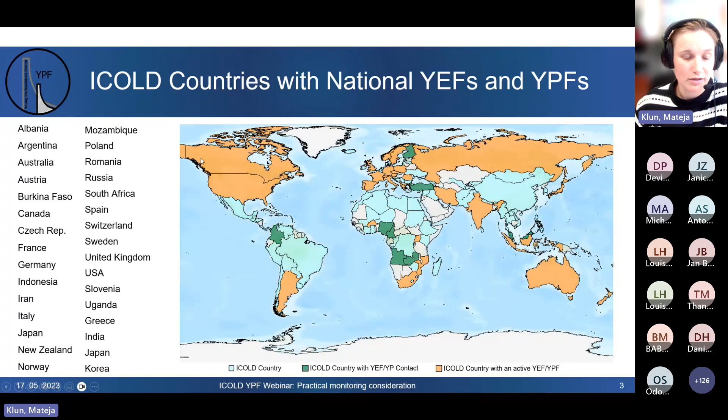Members of the board are voted, and our term of office is typically 3 years. We are trying to be as diverse as possible, geographically, and we're trying to involve the next organizers of the ICOLD conference to be on the board so that we have direct contact with the organizers of the main ICOLD events. We are allowed to have 1 member per member country on the board.

I am also announcing that in Gothenburg there will be elections and 2 positions on the board are open. So if you know a good candidate, or if you believe you're a good candidate, get the support from your national committee and send us your nomination. There is still 1 week of time to do this.

But be aware that you have to attend the meeting in Gothenburg in a few weeks, and there you'll have 1 minute to present yourself. Then all the young engineers and professionals attending that meeting have the right to vote, and if you get enough votes, you are voted to be one of the members of the board and will be able to cooperate with us for the next 3 years.